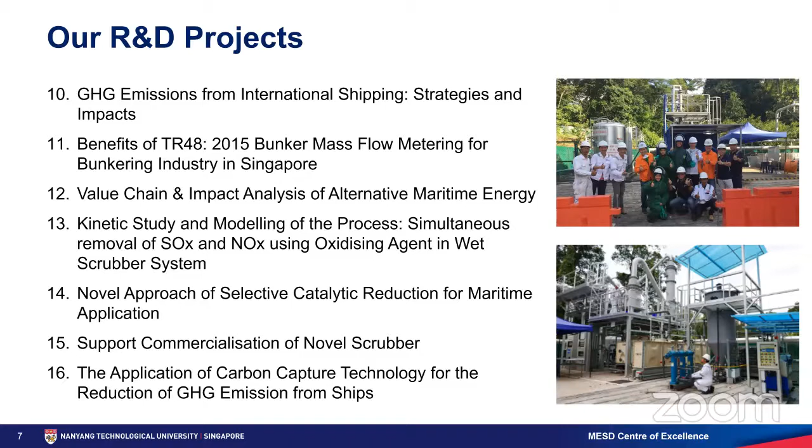We develop a lot of systems related to emission control, such as simultaneous removal for SOx and NOx for ships, selective catalytic reduction for NOx, and most recently, application of carbon capture technology for reduction of GHG emissions from ships.

So this is some of our activities. You are welcome to talk to us, and in the future, if you are interested, we can work together to conduct research, mainly towards green shipping and decarbonization.

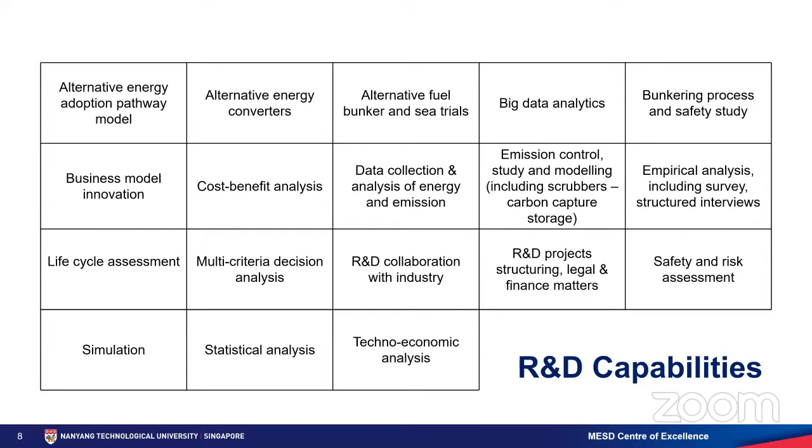Okay, now let's talk about decarbonization. We know shipping plays an important role for the global industry, conducting trade for more than 80% of trade volumes. However, in order to do this, ships need to burn fuel, which in fact produces CO2 emissions. In 2019 alone, it produced more than 900 million tons of CO2, generally dominated by two types of ships: dry bulk and tankers, and containers.

IMO aims to reduce greenhouse gas emissions through different measures: short-term, mid-term, and long-term. A recent study from IMO's fourth GHG study in 2020 shows quite a significant improvement over 2008 emissions, where the emission of 2018 is almost similar to 2008. But projections still show the emission will increase from 90 to 130% by 2050, which is still a big gap towards IMO's targets for 2050.

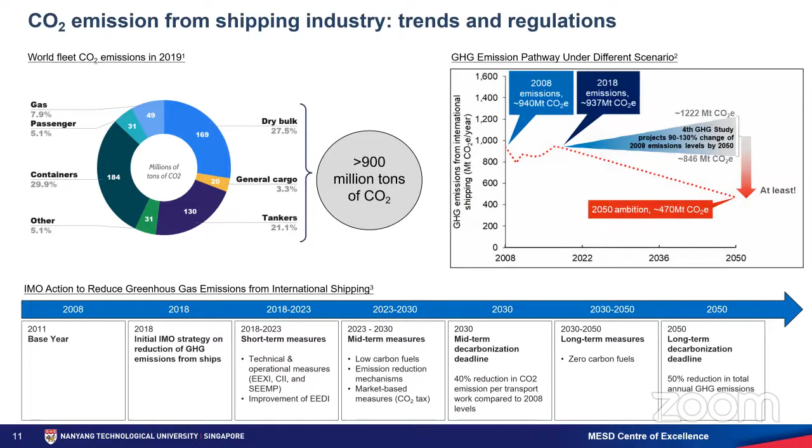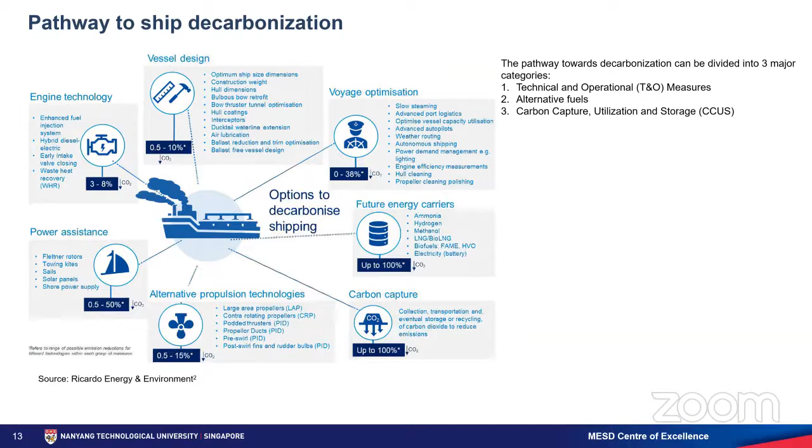So how can we actually go for decarbonization? In general, there are three major categories for ship decarbonization: first is technical and operational measures, alternative fuels, and lastly, but not least, carbon capture, storage, and utilization, which I will discuss one by one in the next few slides.

For T&O measures, the aim is to make ship operations more efficient. This is usually measured using indicators such as EEDI and EEXI. EEDI is for new ships, and the upcoming regulation EEXI will be in 2023. I'll also introduce the Carbon Intensity Indicator, or CII, where the aim is for ships to continue improving their emissions, with checks conducted annually.

According to a recent study by NAPA, EEXI is implemented to reduce carbon intensity by around 4.6% for bulk carriers, while CII aims to reduce emissions up to 11% by 2026—emission here meaning carbon intensity. However, T&O measures alone are not sufficient to meet the targets. So one solution is to work together with T&O measures and find other alternative solutions such as alternative fuel or CCUS.

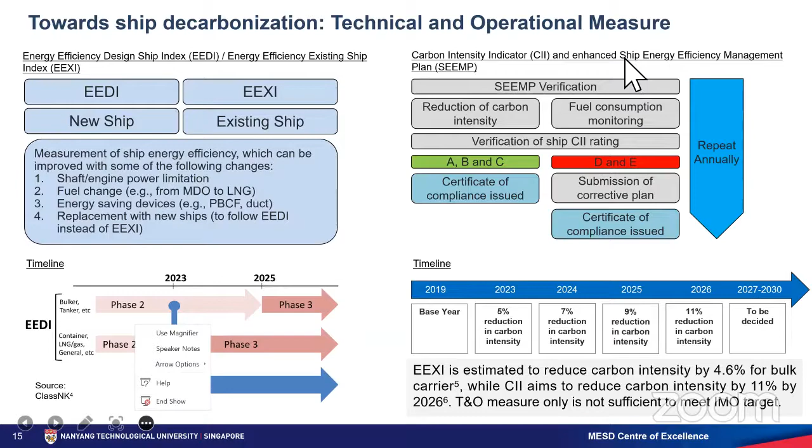When we talk about alternative fuels, they can be divided into four major categories. First is conventional fuels, under categories such as MGO, MDO, and LSFO, etc.

The second type is alternative fuels containing less carbon. This can be LNG, methanol, and its derivatives.

The third one is alternative fuels containing biogenic carbon. Biogenic means it comes from biological sources such as plant, tree, and soil, etc. Fuel under this category can be bio-LNG, biomethanol, HVO, and others.

The last one is alternative fuels containing no carbon. Fuel under this category can be electricity, hydrogen, and ammonia.

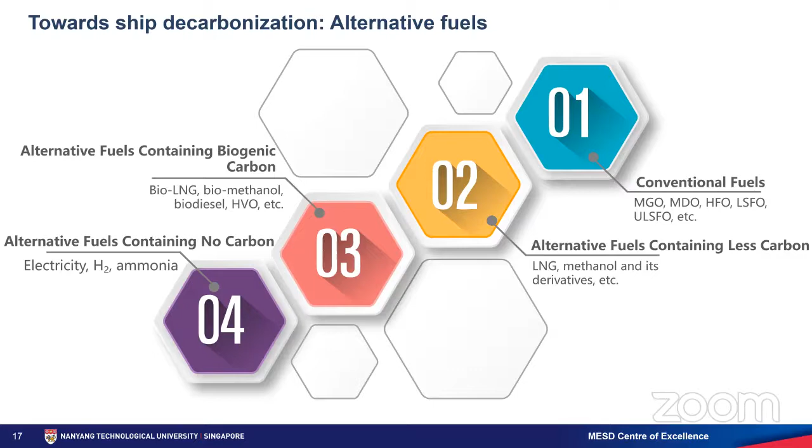There are so many fuels out there, so what is the consideration we need to decide? This figure shows the performance of different types of fuels based on three categories: first is the GHG reduction potential, second is the cost per energy unit, and third is the TRL level.

When we talk about the GHG emission here, this figure shows the emission based on well to wake. This means it also considers the emission from fuel production until it is burned on board ships.

This is important because fuel can be divided into different categories such as gray fuel, blue fuel, and green fuel. It's important, for example, when we talk about ammonia. When we talk about gray ammonia, it produces emissions through its process because their main source is from natural gas. So as an overall GHG reduction, it might not have real GHG reduction savings compared to HFO.

But when we produce ammonia in a green way, or green ammonia, the GHG reduction potential can reach up to 75%. So it's very important for us to see how the fuel is produced, because we want to see the overall GHG reduction potential.

The second one is the cost. Typically at the moment, all fuel produced through a green pathway is generally more expensive than HFO. Of course, this might not be applicable for the future. Once this type of fuel gains more uptake, the cost might drop further in the future.

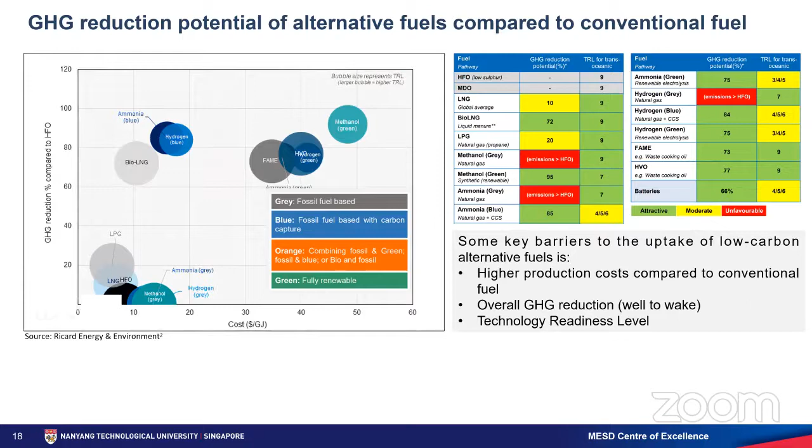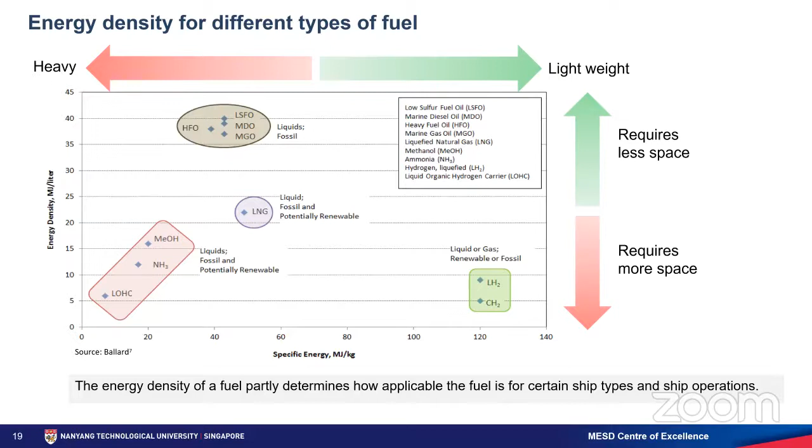The next is the energy density of the fuel. Why is energy density important? Because we would like to have a higher energy density per weight or volume, since with the same amount of fuel it can produce more energy. This is important because the energy density of the fuel partly determines how applicable the fuel is for certain ships and ship operations.

The third solution is carbon capture, utilization, and storage, or CCUS, for ships. CCUS means ships can continue burning conventional marine fuels such as MGO or HFO, but they will install some kind of exhaust gas cleaning system after the internal combustion engine, where the CO2 will be captured and either utilized further or stored on board, then transported to land for further storage and utilization.

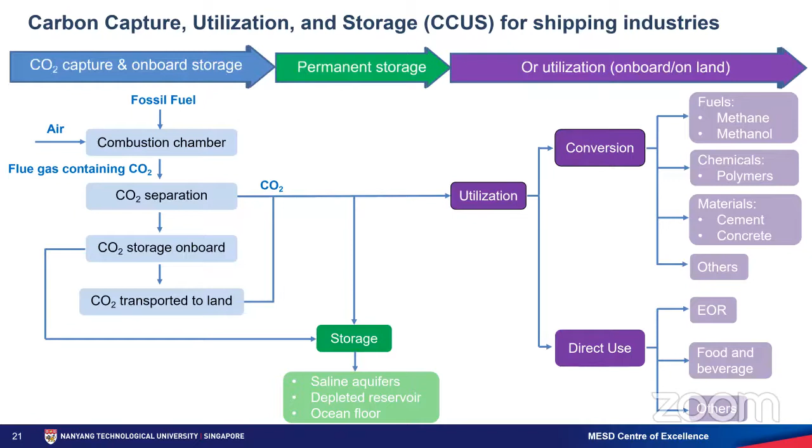CO2 generally can be stored either deep below the ocean floor or in saline aquifers. CO2 also has the potential to be utilized further, either converted into another fuel such as methane or methanol, chemicals, building materials, urea, food and beverage, and others.

In general, we talk about CCS, but in fact the CO2 capture itself has different methods. There are three main general methods to capture CO2: pre-combustion, oxy-fuel, or post-combustion. The definitions are quite straightforward.

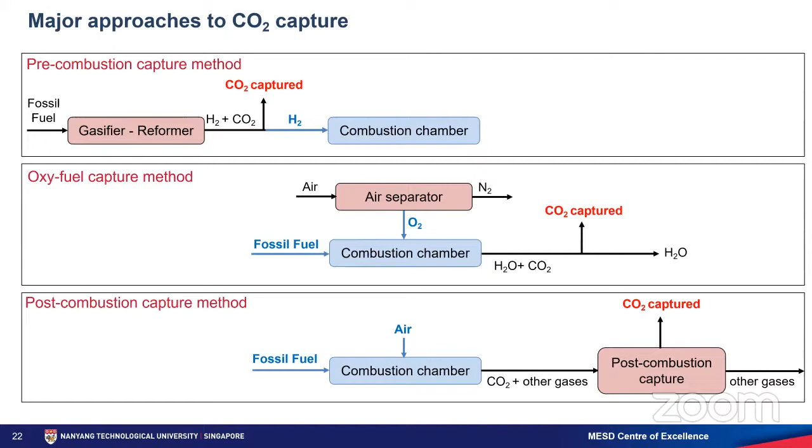Pre-combustion means the CO2 is captured before combustion. Oxy-fuel means you replace the air with concentrated oxygen. Post-combustion capture means you don't make any significant modification to the fuel and engine system - you just install an exhaust gas cleaning system to capture the CO2 after the emissions. So the question is, which one of these technologies is suitable for ships?

It depends on a few factors. For pre-combustion capture, fossil fuel is burned, then the fuel produces hydrogen, which is burned in the engines. So there will be significant modification to the engine and fuel systems, and significant investment. Pre-combustion is not possible for existing ships, but it can be considered for new ships.

For oxy-fuel combustion, it's possible for both existing and new ships. However, the technology at the moment is not yet mature. The TRL level is still not in line yet. It's still in development, and it also requires significant modification because you need to install a unit to separate the oxygen from the air.

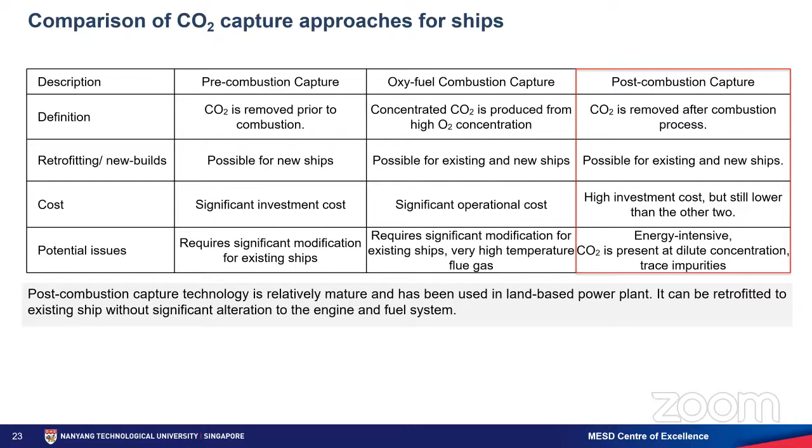For post-combustion capture, it has more flexibility. It's possible for existing and new ships. It has a high investment cost, but it's typically lower than both pre-combustion and oxy-fuel combustion. The issue of post-combustion is the process is energy intensive. The CO2 comes out in a diluted concentration, and it also has impurities which might affect the system.

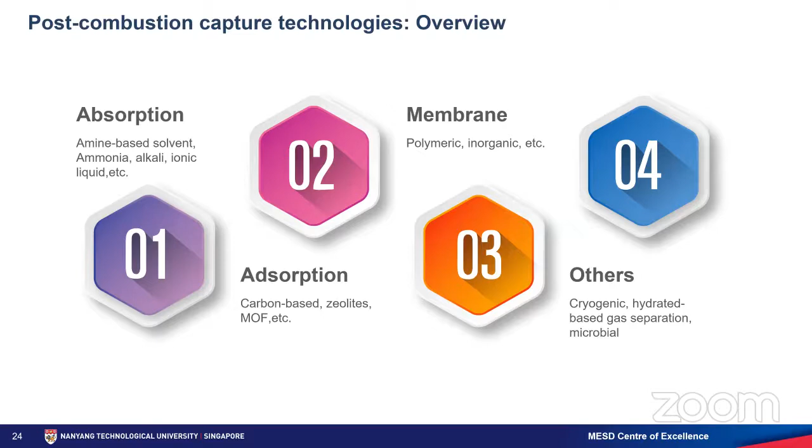So when we dig more into post-combustion capture, although there are a lot of technologies out there, in general it can be divided into four: absorption process, adsorption, membrane, and others. So how can a shipowner decide which technology actually has the potential to be used for ships?

Between all these technologies, the most mature technology is called amine-based solvent, and the typical chemical used is MEA, or monoethanolamine. This technology is considered the most mature technology for land-based application. It has been installed in many power plants and is proven to work really well.

But this TRL level, it still doesn't exist for land-based... so the TRL level for ship application is expected to be lower. Why? In the next slide, we have a case study trying to compare the impact of directly using the amine-based application for land-based systems on ships.

On the left side, you can see the diagram of the estimated cost between CCS for land-based application and shipboard application. In the first three, the CCS is installed for either cement plant, steel, or power plants. The estimated cost for CCS is around 40 to 50 USD per ton CO2. But when the same system is installed on ships, the cost is significantly higher, at $82 USD per ton CO2 only for 73% capture.

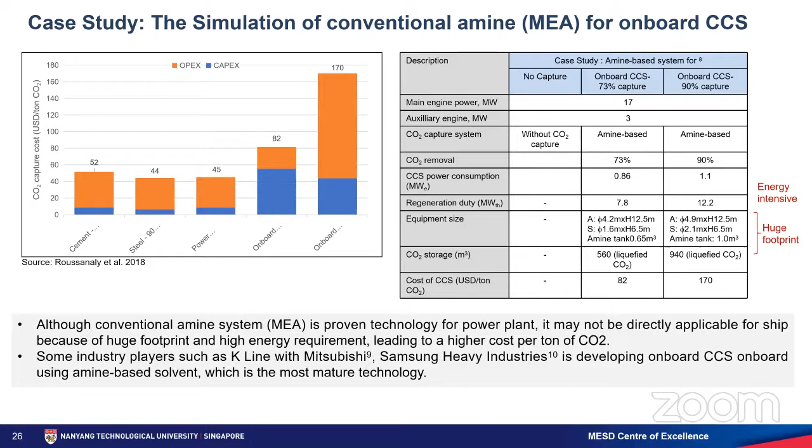In fact, some well-known industry players such as K Line with Mitsubishi, and also Samsung Heavy Industries, are also exploring installing and developing CCS on board. And from what I know, they are also using the amine system because based on the TRL level, amine is already proven, while other technologies may be promising, but at the moment the TRL level is still low, and it will be a huge gap to overcome if they want to consider other technologies than amine.

So next, in all these previous slides I introduced, there are many solutions of alternative fuels. Alternative fuels also have 4 types of fuel that you need to choose. For CCUS, you also need to decide what technology to use.

So what is the challenge or tool for ship decarbonization of emissions? In my view, there is no one solution that fits all, but I believe for all these considerations, ship owners or players in the maritime industry will have these 4 concepts in order to select the solution for their ships: mainly technical, economic, environmental, and safety aspects.

For the technical perspective, you need to consider what type of ships you have, what available resources you have. Different types of ships may have different available space, different available electricity and power. What's your engine? Is this a new ship?

When talking about new ships, you can consider more alternative fuels because you have much more flexibility in designing new ships. But for existing ships, you have a lot of limited resources. Then you might need to consider whether to install CCUS or use alternative fuels without significant modification to the engines.

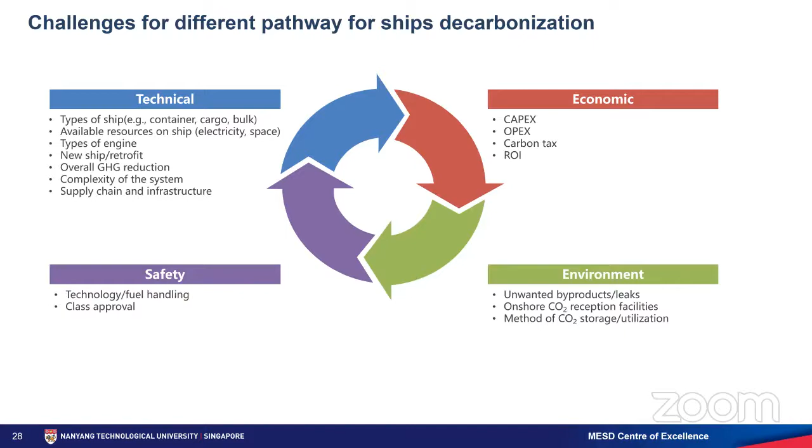Some predict LNG will become the dominant fuel in the market. Some estimate hydrogen and ammonia. I believe none of these results is wrong, because at the moment the situation is very dynamic.

In the end, I believe the type of fuel or technology that comes out on top will depend on how fast the technology goes into commercialization, and also whether the infrastructure can be ready and readily available for ship deployment.

So at the moment, the use of conventional fuels, I believe, is still predicted to continue, at least until the uptake of all these alternative fuels is ready.

So the path toward ship decarbonization could be shared either by conventional fuel plus CCUS, or alternative fuels, or a combination between alternative fuel and CCUS, and eventually by 2050, maybe it will move towards no-carbon fuel.

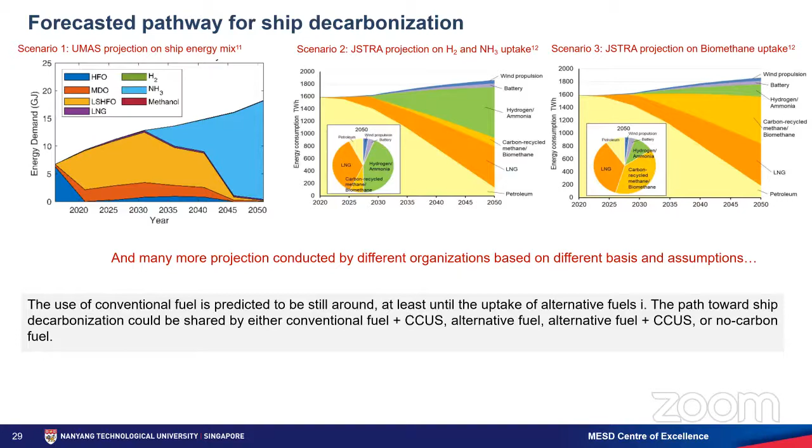So this is the end of my presentation. Thank you so much.

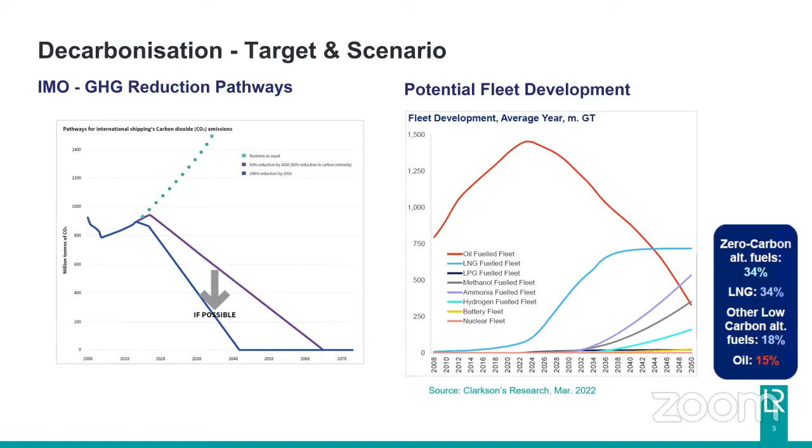When we look at the adoption of alternative fuels, there are some brief factors to consider. Essentially, we want to see that regulatory development is paving the way. For the pathways or strategy, IMO has done that part, and we will see more regulations coming up. For instance, we have seen EEDI, EEXI, and emission-related requirements like CII coming up. We might also see more of these in the next couple of years.

For let's say EEXI phase 2 perhaps, or EEDI phase 4 perhaps. Essentially all of this will provide sufficient buffer or pressure to the industry to adopt all those alternative fuels.

And essentially the technology also has to be ready. In terms of the engines, the fuel preparation systems, the fuel containment systems - all of that needs to be readily available with sufficient in-service experience, so that owners and operators have sufficient confidence to invest in this and operate.

And all the fuels we discuss also need to be available in suitable locations to cater to the vessel's operational needs. Going back to the energy density topic we discussed in earlier presentations, finally, the energy cost of using these fuels will also have to be looked into.

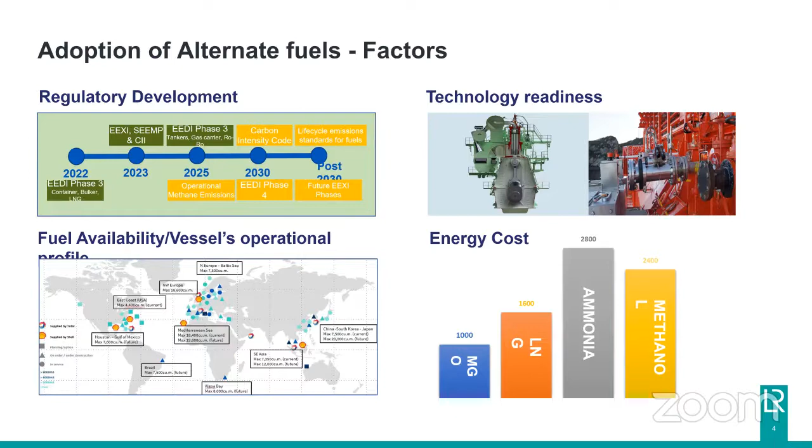So methanol, as we discussed, forms one of the options. This slide gives a very brief overview of what methanol is. It's an alcohol-based compound, and currently it's being produced extensively from fossil-based sources such as natural gas or coal. In the industry, there is sufficient experience in transporting it on board chemical tankers and methanol carriers.

In Singapore previously, we used to have a lot of offshore supply ships carrying methanol as cargo for offshore applications. So there is sufficient in-service experience, and in terms of storing it on board, it can be stored as a liquid at ambient conditions, unlike some of the other fuels we're looking at. If there is a spill, it is still considered much safer than other fuels because it's biodegradable, and it also offers some level of reduction in emissions.

But there are also some challenges. For instance, it is a corrosive liquid. It also poses some toxicity risk to people exposed to it, for instance the shipboard crew who will have to operate methanol fueled machinery or do bunkering of it. To cater to that, we will have to install additional safety systems, which are much more complex than what we now have on board.

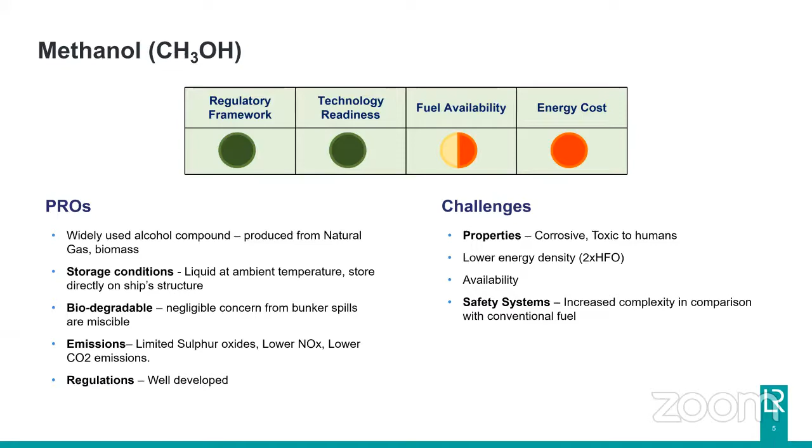So let's take a brief look at the availability of methanol and how future availability will be influenced by some of the regulations that are coming. Currently, more than 90 production plants produce close to 100 million tons per annum. The mix is now almost 65% coming from natural gas.

But going forward, that may not be sufficient because life cycle emissions related regulations and requirements are coming into play, which might impact how this fuel is produced. In terms of IMO, draft guidelines for life cycle emissions analysis for these fuels are being developed. These will have to be complied with when we consider zero carbon fuels or even fossil-based fuels used on board.

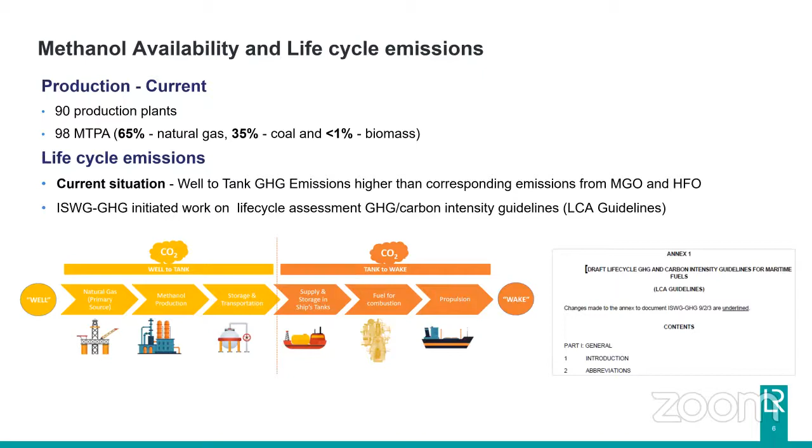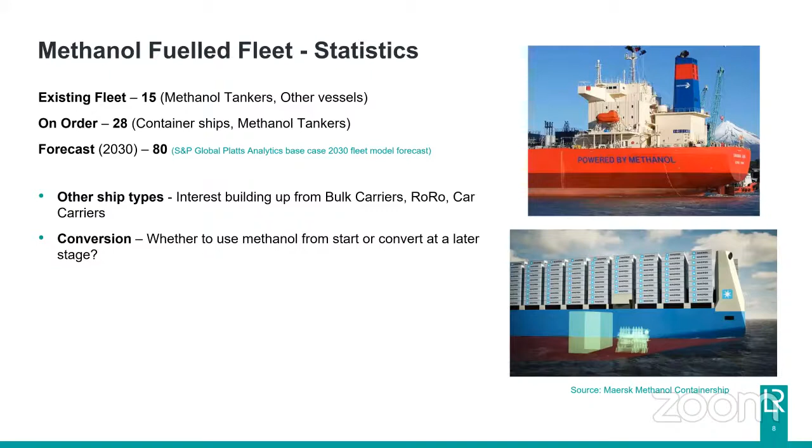So what about the regulations, where do they actually stand now? In terms of carrying methanol as cargo, the regulations are all very well developed, carried under the MARPOL Annex 2 requirements and also the requirements from the IBC code. In terms of containerized cargo, the IMDG code also provides sufficient regulatory requirements.

In terms of fuel, IMO has released interim guidelines with very prescriptive, detailed requirements for the application of methanol regarding storage on board, processing it on board, safety systems, and all of that. Lloyd's Register has also been working on this for many years, and we have our own rules detailing all those requirements to ensure safe application on board. In terms of standards, we've also developed a methanol bunkering technical reference document, which has been used extensively in the industry for handling methanol bunkering operations. ISO is also currently developing a marine methanol fuel standard - that's work in progress.

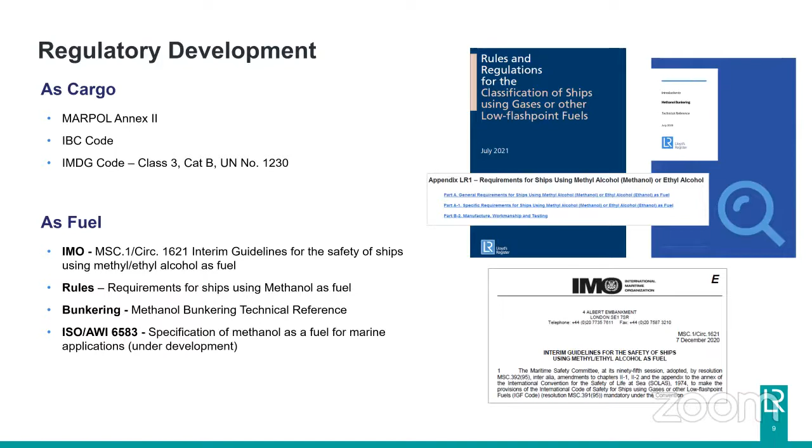So regulations, as we can see, are more or less fully developed. In terms of technology, methanol fueled engines have been in operation for more than 7 years - methanol tankers and chemical tankers are using these engines from MAN. We also expect engines from WinGD using methanol to be released close to Q2 of 2024.

And in terms of auxiliary engines, there are also developments in place. Wärtsilä has developed the 32 series engines, which could use methanol. Hyundai Himsen is actually developing engines which could also use methanol as a fuel.

We have also worked on conversion of these smaller engines, essentially for the first conversion project that we did in Sweden for the Stena Germanica project. That was a conversion of a diesel fuel engine to use methanol as a fuel. So all of that is actually possible, and the technology, to a certain extent, is readily available.

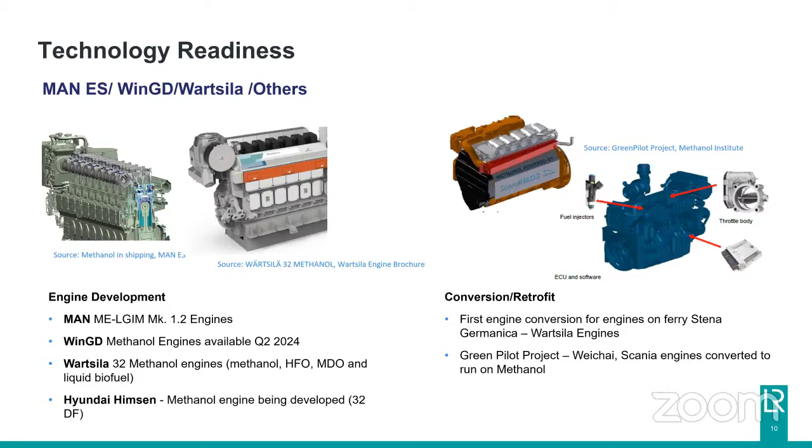So we wanted to establish or investigate this a bit further. And as part of that study, we evaluated a fleet of container ships operating in Asia. So a green corridor study was undertaken, essentially looking at what sort of fuel pathways these vessels could actually look into. We examined methanol as an option, ammonia as an option, and also hydrogen as an option.

So how could we transition now from what it is now, mostly LSFO or MGO, to all those renewable fuels in future? And as part of this study, we also wanted to look specifically into what it could take to use methanol as a fuel on a feeder vessel of this particular profile.

So we looked at this particular case vessel, close to a 3,000 TEU container ship, essentially looking at how and what it's actually required to use methanol as a fuel for this particular ship. We looked at a carrying capacity of close to 3,500 cubic meters and an endurance of 10,000 nautical miles at a speed of 18.5 knots.

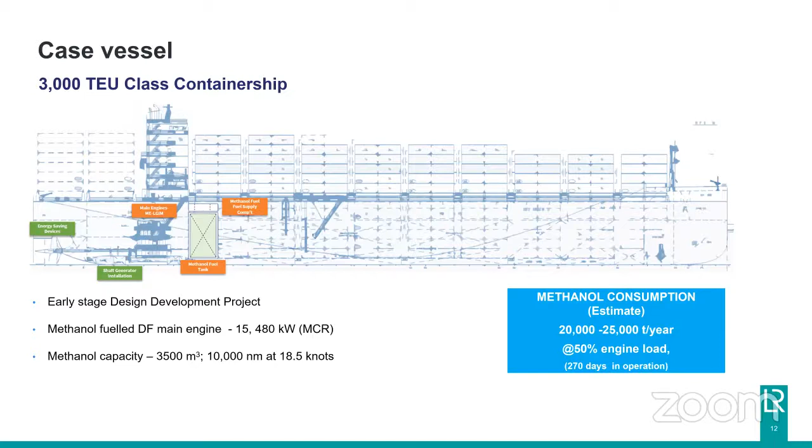So we estimated that close to 20 to 25,000 tons per year of methanol will be required. That's just looking at the engine operating at 50% load and roughly around 270 days of operation. So these are just very high level estimates.

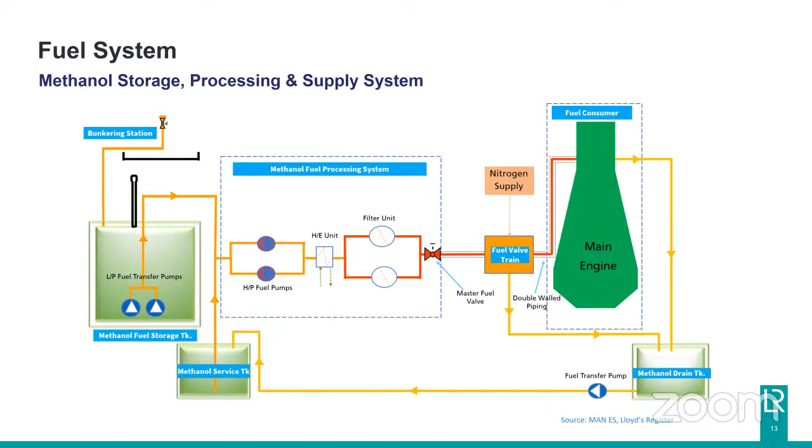So this could definitely differ from engine maker to engine maker, and depending on the type of engine that we are actually looking at. Just to give an overview, these would be some of the systems that need to be put on board, if you're considering a vessel.

So essentially, we also wanted to look at it from a risk-based perspective. Of course, the draft guidelines are there, there is also the rule requirements, but we also want to ensure that the risk due to these additional systems on board, the additional containment of methanol on board, processing it on board, are also addressed.

So from a Lloyd's Register perspective, we normally look at it from a risk-based certification method. So essentially looking at what specific risk could come up as a result of adding these components on board, storing this methanol on board. And then we will run this through hazard workshops essentially to understand the specific hazards and what specific mitigative or preventive measures are put in place to address these particular hazards.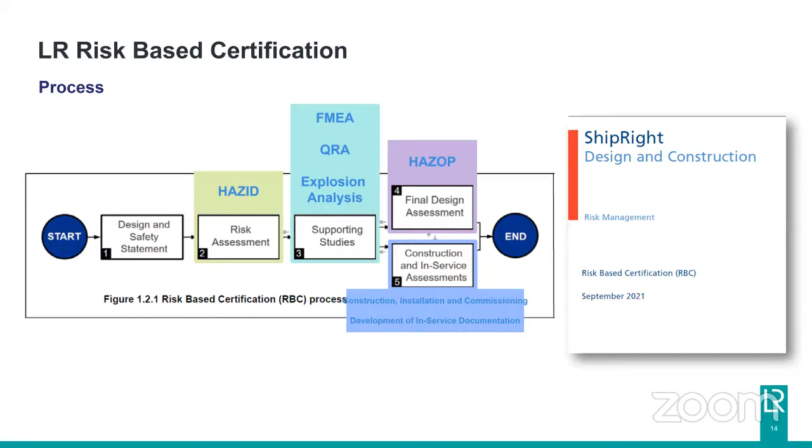And just to give maybe an illustration of how we have done that on the same system that we looked at in the earlier slide, I'll share some brief. So this is essentially looking at one particular part of the system that we saw earlier - the bunkering operation, and also going into the storage tanks.

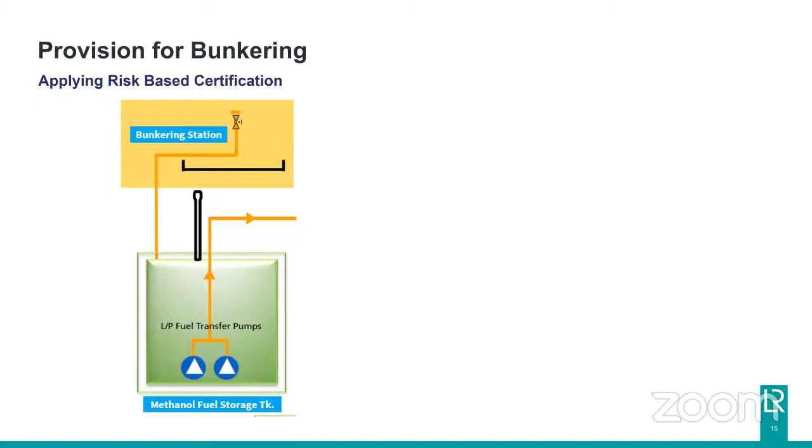So essentially, when we put this through a risk-based certification method, we are looking at this particular node, and we are trying to find out what specific hazards could result from this bunkering operation. So it could be methanol leakage, and as a result of that leakage, personnel who are exposed to this could be exposed to toxicity-related risks. There could be some fire considerations because methanol is a low flash point fuel, and there could also be contamination of the fuel, and essentially risk due to the specific location of the bunkering station.

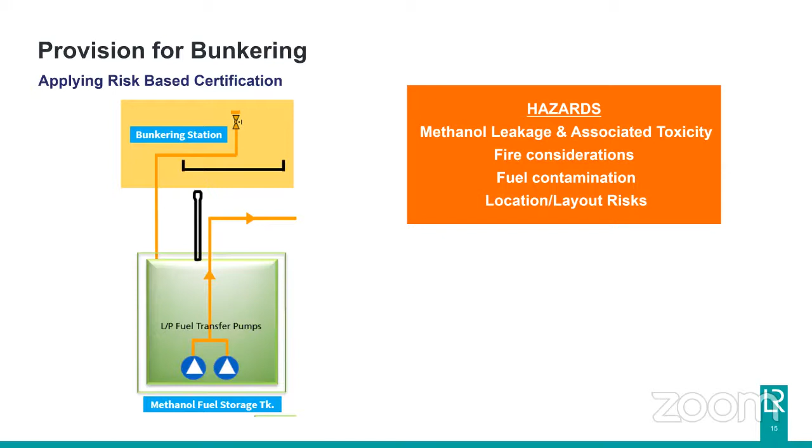If it's located too close to the accommodation area, or near a location where we have, let's say, the lifeboat, or an emergency escape route. Once we know these hazards, the next step is to identify and put in place some preventive or mitigative measures.

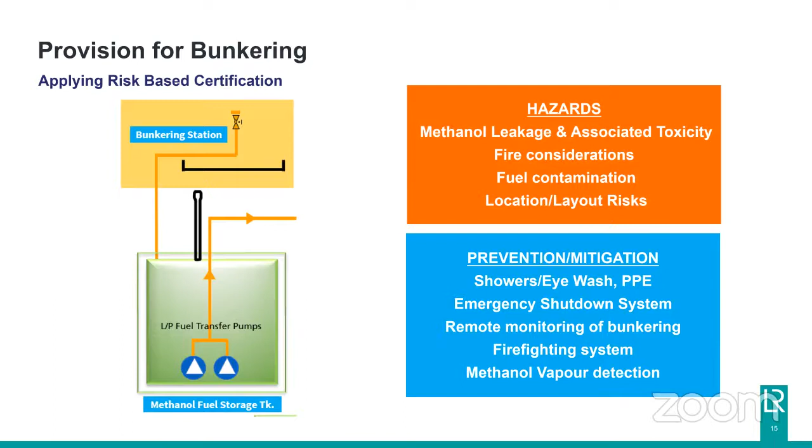Once we know these risks, we look at preventive or mitigative measures such as showers or eye wash, essential PPE for the pax, emergency shutdown systems, and remote monitoring of the bunkering operations. Some of these are covered under the prescriptive requirements given in the interim guidelines from IMO. We could then look into additional systems like specific firefighting systems for this particular location, provision for vapor detection, and some form of action initiated as a result of methanol being released.

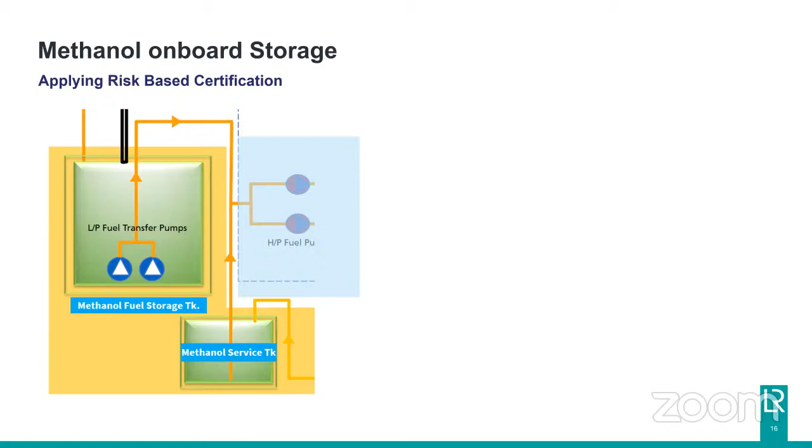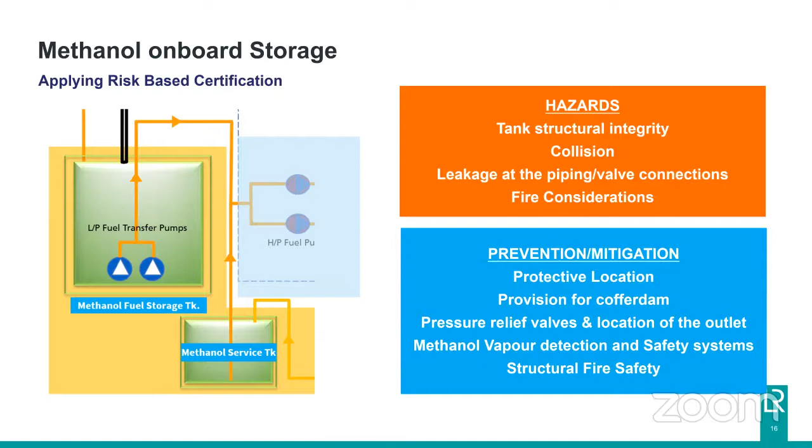In the same way, we could run that for the methanol onboard storage facility. What could happen if this methanol storage tank or service tank is compromised, if there's a leakage from the storage facilities? We could look specifically into the hazards and then into the preventive or mitigative measures that could be put in place. If there's a structural integrity issue or a collision, we look at a protective location for this particular tank, provision for a cofferdam to protect the tank contents from any heat ingress if it's located adjacent to a machinery space. Those kinds of provisions can be put in place once we know these hazards.

So essentially, that's how we evaluated this. We looked into a particular design, a container ship. What would it take to operate a vessel using methanol as a fuel for a specific container ship? We looked at some of the systems that have to be put in place, and what safety measures have to be put in place to address some of the risks associated with its application.

In summary, we know the technology is available. The engines are sufficiently developed, with sufficient in-service experience in terms of the process systems and tank containment systems. It can be contained in integral tanks with sufficient coating. All of that is in place. In terms of regulations, classification requirements and statutory requirements have developed sufficiently. And in terms of in-service experience, a number of new-build vessels are on order, and a number of vessels are also operating, so experience on that front is there too.

In terms of life cycle emissions, or how methanol production could cope with upcoming life cycle emission related requirements, that's a specific issue that will be addressed through regulations once they come into place, and also through extensive investment by parties producing methanol. And in terms of the safety systems on board, once we run this through risk assessment sessions and the risk-based design methodology, all of those risks associated with its use could be safely managed.

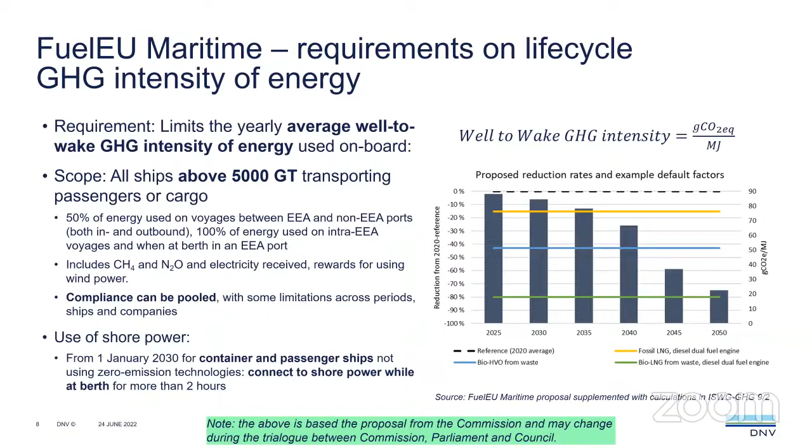So next I'll go into seeing what we see from the alternative fuels and status and activities in the market.

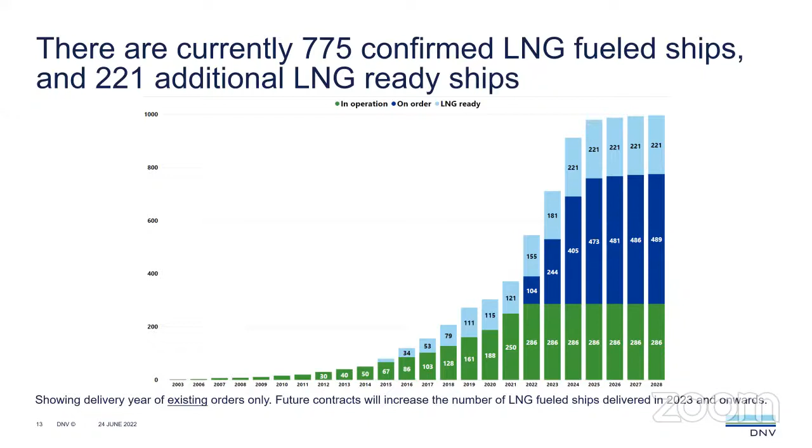There's currently 775 confirmed LNG fuel ships and an additional 221 LNG-ready ships based on these illustrations. Most of them belong to the category of container ships in the largest bar chart, followed by car carriers as well as tankers.

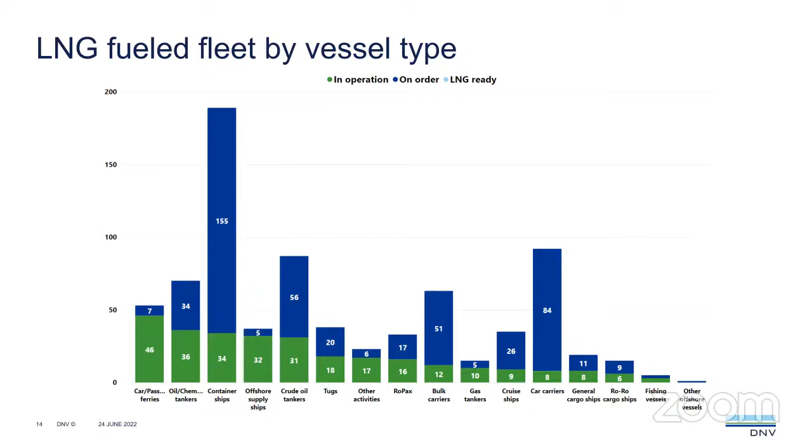In considering other fuel options, cost is definitely key. But this illustration represents all the different factors that determine the alternative fuel choice. So availability, for instance, in the left column: it's already available for MGO, LNG, and LPG. For methanol it's still a bit unclear. For bio or e-fuels, hydrogen, and ammonia, there's still a lack of availability. The different factors are self-explanatory.

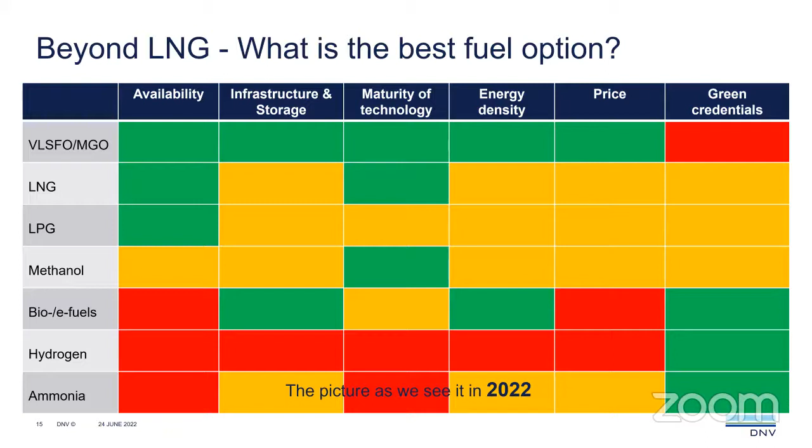Where we see changes that may occur within this table would be in the first and perhaps the second column, so this may change by 2035. This basically represents one of the different scenarios that DNV has forecasted, which is what our first speaker presented in terms of projections of the different fuels. We definitely see, with increased interest in bio and e-fuels, hydrogen and ammonia, that availability on that front may change.

With regards to detailed studies on infrastructure and storage, the colors for ammonia at least may change. I'm the project manager for the ammonia bunkering safety study that we have recently been awarded in conjunction with GCMD. There's a lot of interest and uptake regarding the safety of ammonia that has to be uncovered before ammonia is a safe fuel to be used within the maritime industry. So this is just an illustration of how the possible picture in 2035 may look.

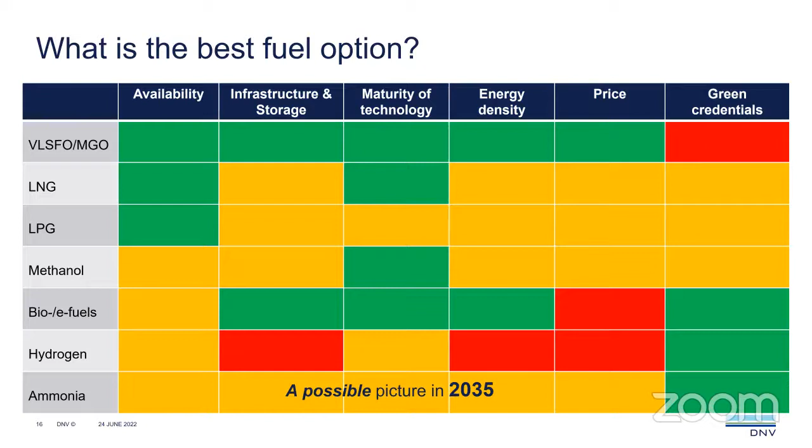Storage challenges, as we heard from the previous speaker, would change with different take-up of alternative fuels. This is an indication of an ammonia version of a 4 by 1,750 cubic meter tank on board, from Deltamarin. With hydrogen, with an expected similar operational profile, you would need a 6 to 10 times increase in bunkering intervals, while the fuel tank volume for ammonia is about 4 times. These are the considerations ship owners must weigh when deciding on the repercussions for new ship designs with alternative fuels.

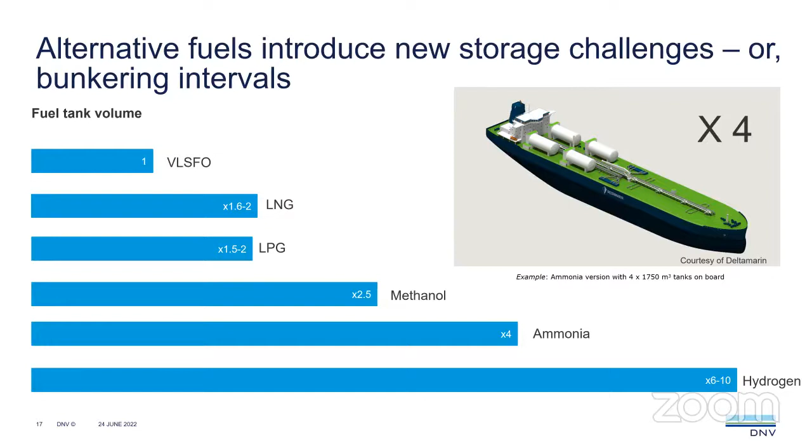I mentioned earlier the work we are doing with GCMD on the ammonia bunkering safety study. We see commercial take-up of ammonia happening perhaps only in the mid-2030s, with engines becoming available from engine makers starting mid-2025 onwards, beginning with 2-stroke engines and then subsequently extended to 4-strokes. We've performed a couple of similar studies in the Port of Rotterdam as well as Oslo, and I'm happy to share that perhaps during the panel session.

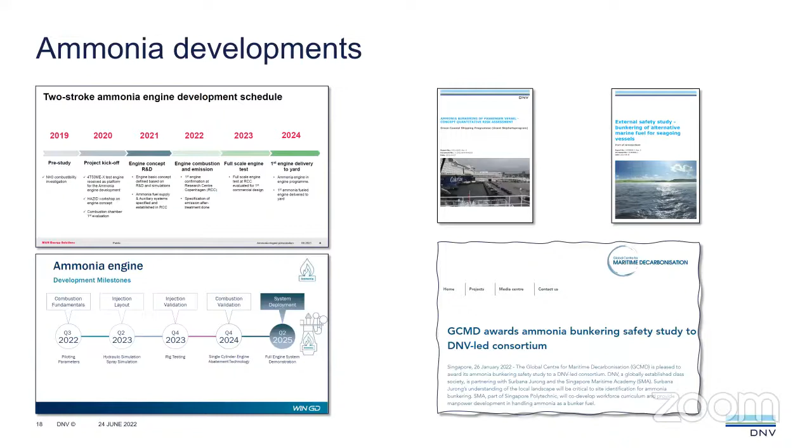Beyond alternative fuels, what are the other considerations available here? I think we touched on this a little with the first speaker: reducing energy consumption via optimization of logistics and digitalization, increased use of enhancements in hydrodynamics, and even the machinery within the vessel itself.

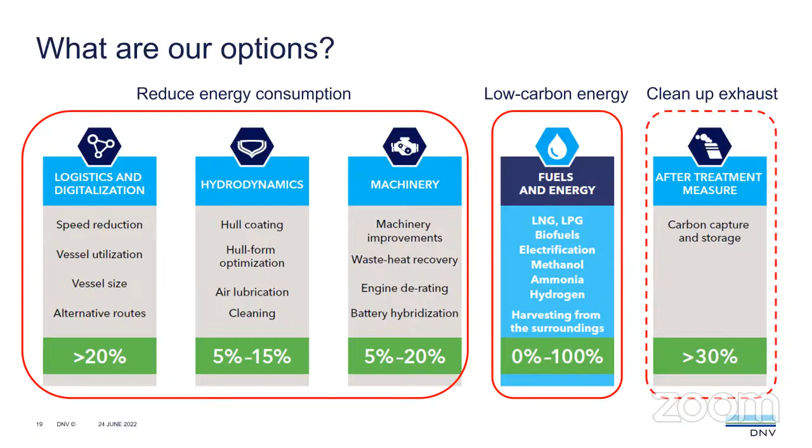We spoke a lot about the center portion there on low carbon energy, and now it's the CCUS portion, which again has also been covered perhaps by our counterpart in IMarEST.

When it comes to maritime CCS systems, there are basically three points to be considered. The system itself, whether it's post-combustion or pre-combustion as mentioned earlier, has to be taken into account, and how the clean gases leave and how CO2 is then captured as an agent or as a pure stream.

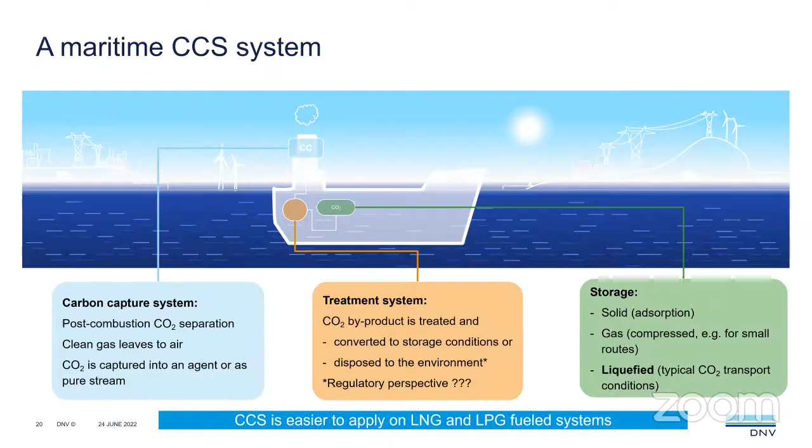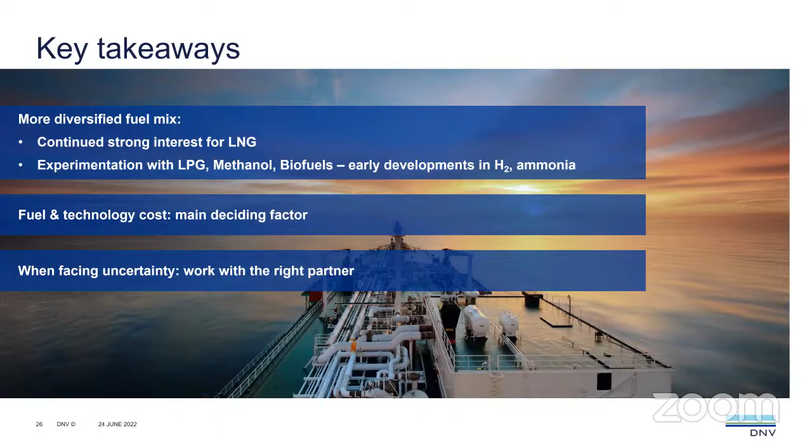But beyond that, recall the 6 main factors I've shown previously: structure, safety, some of which will be a function of fuel and technology costs. And when facing uncertainty, choose the right partner in terms of deciding how to navigate these different choices you may have with alternative fuels.

So that's all I have. Thank you very much.